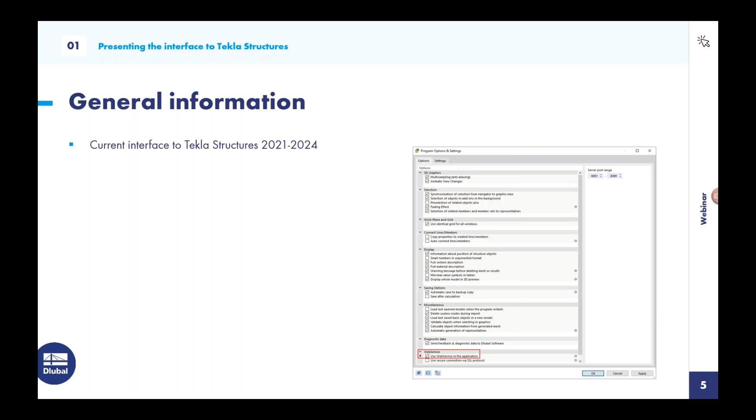Our interface, where's my mouse? Okay, our interface supports the Tekla versions 2021 to 2024. It's a direct interface based on the web services. So we do not create a file of a certain type, but we transfer the model directly from one program to another. So to do this, you need to have Tekla and RFEM. Tekla and RFEM must be open on one PC to transfer the data from Tekla to RFEM or from RFEM to Tekla.

The installation of the interface must be done manually. So after the RFEM installation, you find under this following path a setup file. You need to run the setup file, and a Dlubal tab will appear in your Tekla ribbon. And both the import and the export are started from the Tekla ribbon. And the last step is to check the necessary options for the interface. So you need to check your program options in RFEM 6 and activate the web service option. And after that, that's all for the setup of the interface, and now it's ready to use.

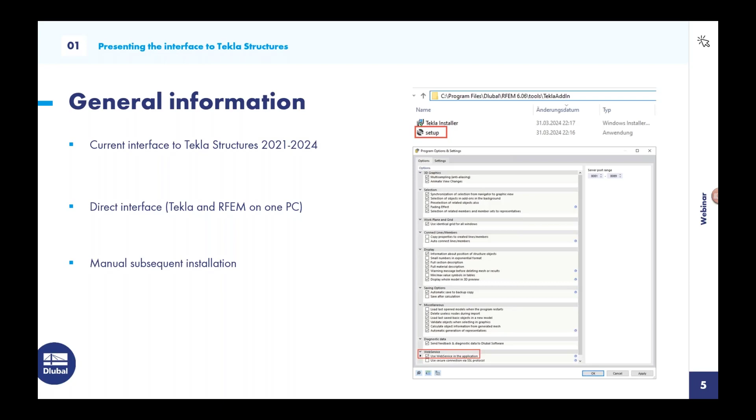So next question is, what information can we transfer from Tekla to RFEM? These are the main objects. We can transfer members and surfaces, also the information about the sections and the materials. And when we use the analysis model in Tekla, you can also already define supports, hinges, or rigid links in Tekla and export this information to RFEM.

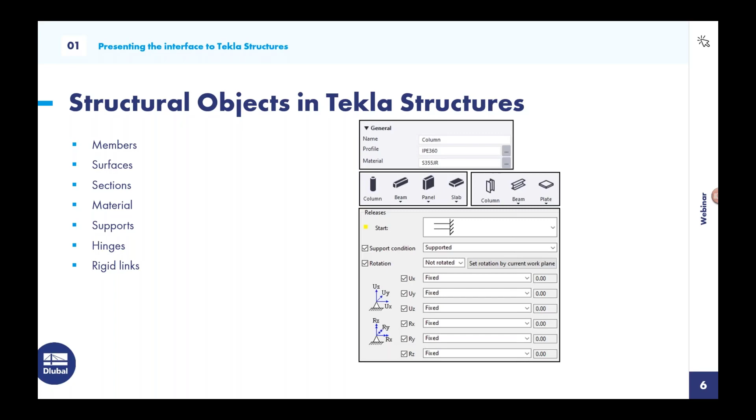So let's look at the export options for the export from Tekla to RFEM. We have the following export options available. We have two types of model we can export. We have the physical model. It's like a CAD solid model which does not take into account the axial positions. So elements are not automatically connected to each other at their intersections, since we are only referring to the axes of the physical elements. And this is something I want maybe to show you.

So if we have a physical model, for example, like this, and the wall meets the ceiling. In this physical model, the bottom edge of the wall meets the ceiling at the bottom edge of the ceiling, the black one here. And this is the physical model, and with a structural model, we require an intersection between these two axes of the models. So if we export only the physical model, we get some connection problems in these areas. And to solve this kind of connection problems, we have the option to generate an analytical model in Tekla and export this analytical model.

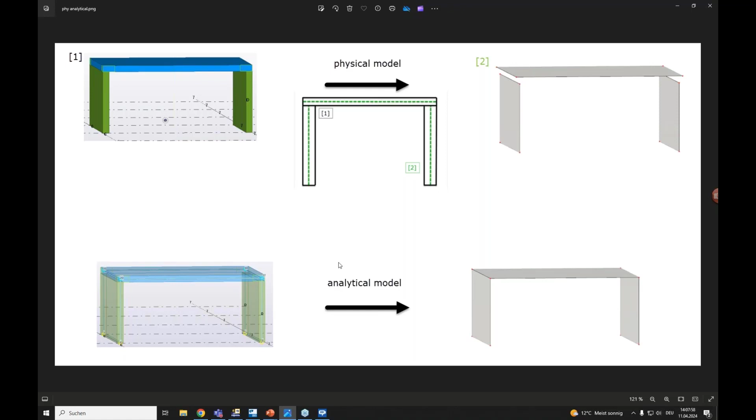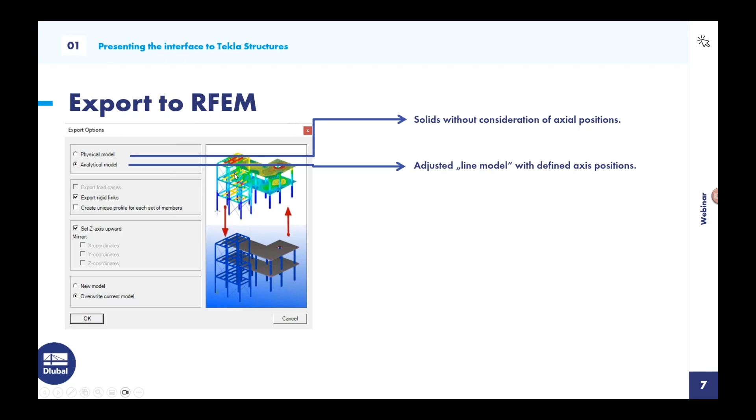So with this analytical model, maybe I show this here. So here we can also export the analytical model, and with this analytical model you get an adjusted, call it line model, with defined axis positions. So every element will be connected, and you can just export this model and keep on working on the structure.

We can also transfer rigid links we generated in the Tekla model to RFEM. So when analytical model elements are not aligned or a rigid connection is created in Tekla, we can just transfer it to RFEM.

And some cross sections that are the same are summarized in one cross section number in RFEM. So with this option, you can separate them and get an individual cross section number for each member from Tekla. The Z-axis in Tekla is aligned upwards. So with this, we just align the global Z-axis in RFEM also upwards.

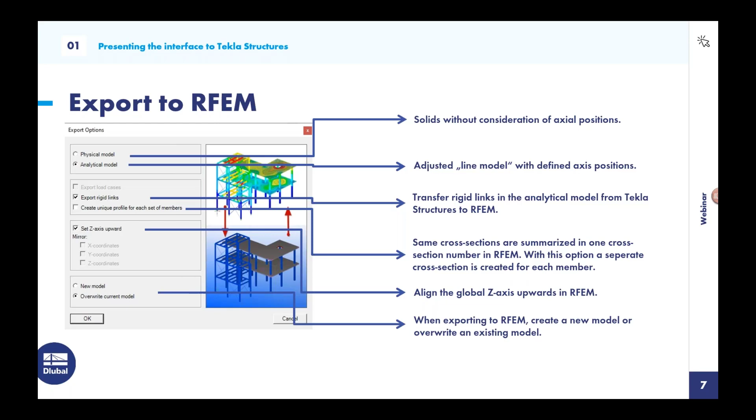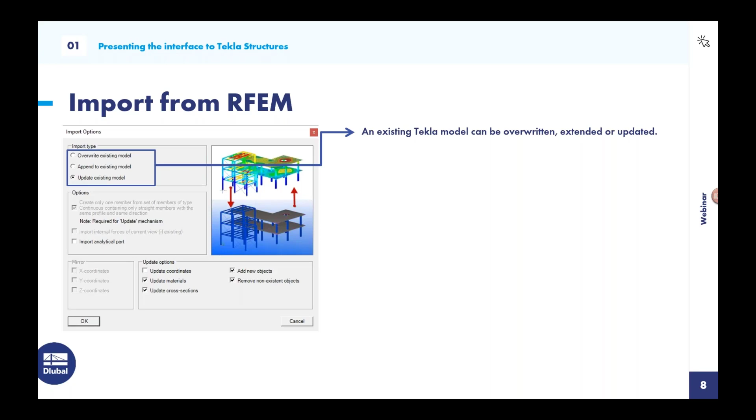And when we export the Tekla model, we can create a new model in RFEM, or if we have a model opened, we can overwrite an existing model. So that's all for the export options. If we import a model from RFEM to Tekla, we have the following options available for now. We have three options for the import type. We can overwrite a model, we can extend a model, or we can update changes we made in the model.

The update has some separate settings we can adjust. So we can update the coordinates, we can also update the materials and cross sections, and also new objects added in RFEM are added, or if we delete objects in RFEM, they can be removed also in Tekla. And what I'm showing here is for now an internal version of the interface. So the update function will be available next week in the customer version. So for now, maybe it's still grayed out for you in the actual version.

And we have also the option to generate an analysis model from the RFEM model if we import it to Tekla. And if we are extending a model or overwriting an existing model, we can also mirror the elements if we want in X, Y, or Z direction. Yeah, that's it for the import options.

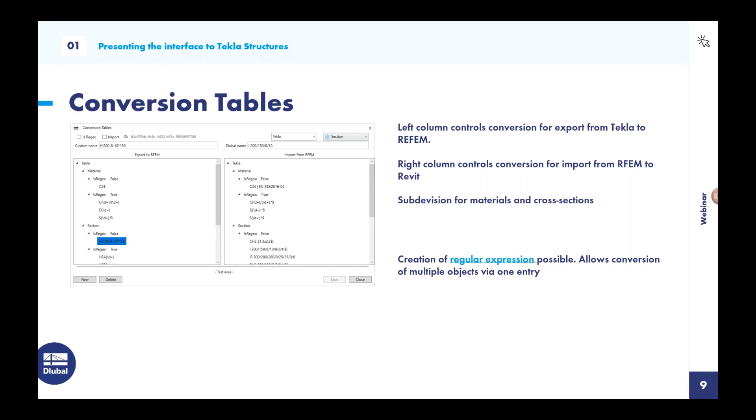So that's all for the functionality of the interface. Now we want to look very quickly at an overview of how we can apply this in a workflow. So a possible workflow may be that we generate an analytical model in Tekla. We define information about the cross sections, materials, supports, hinges, member types, and also rigid links. Then we can export this complete model to RFEM.

We can modify this model. We can add members or define loads and design the structure and optimize it. And every change we made, we can transfer back to Tekla with the update function. So every change to sections, materials, or newly added objects can be updated in the Tekla model.

So if we want to look only, for example, at the steel model in Tekla, we can also generate different analytical models independent from each other. So we can only export one part of the model to RFEM and only look at this one part in RFEM and apply modifications and additions, and also update only this part of the Tekla model.

A last possible workflow would be if we define a structure in RFEM and want to export it to Tekla. We can also export the whole model or a part of the model to Tekla, and if there are any changes made afterwards, you can also export them to Tekla with this update function.

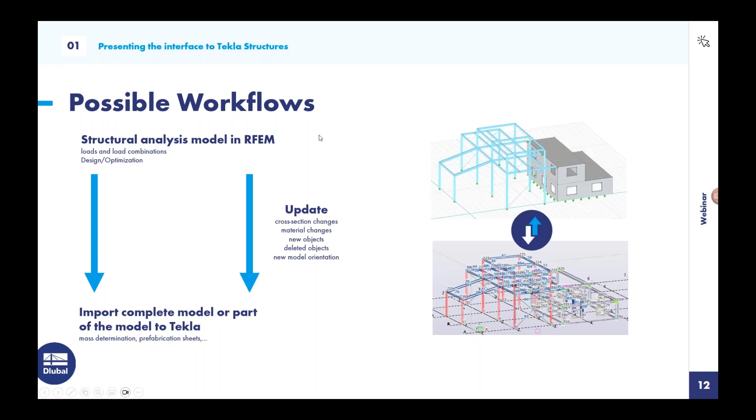And yeah, that's all for the presentation in this PowerPoint. We switch over to Tekla. So here we have a model. If you installed the interface with the setup files shown in the presentation, you find this Dlubal tab on your Tekla ribbon. And here you see the things we talked about, the import options, the export options I showed you, and also the conversion tables.

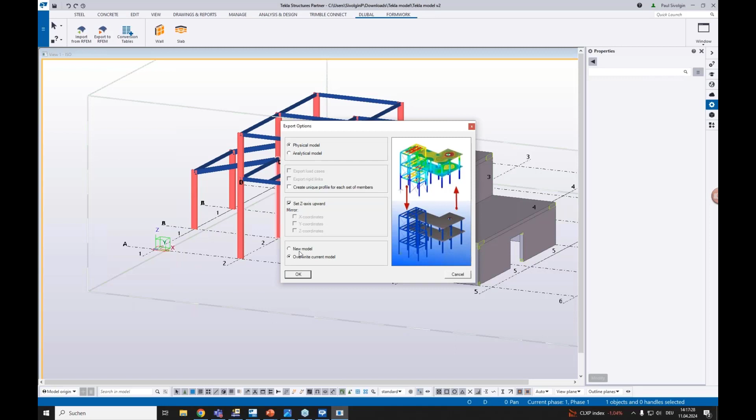So first thing I want to show you is what happens if we export this physical model without generating any analysis model. I have an RFEM file opened, so I can export just this physical model and overwrite the RFEM file. If we start the export, we will see that RFEM gets locked down here. Gonna start now, I guess. Yeah, it's locked, so the data is transferred to RFEM.

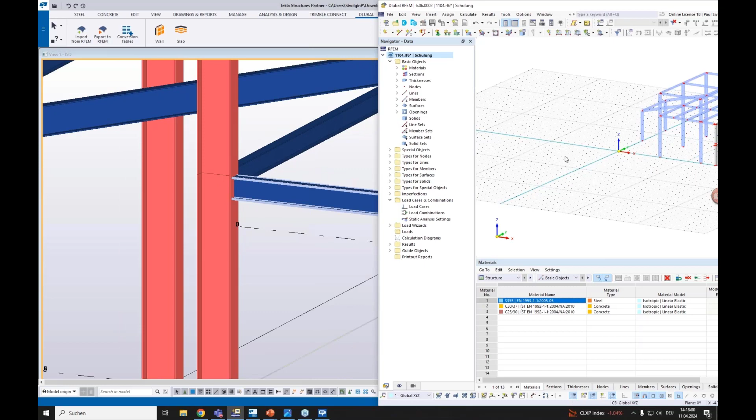And if you look at this beam and this column, we see that the beam is connected to the flange of the column. So when we transfer it like this to RFEM, we also see that this beam is connected to the flange of these columns. But if we look at the line model in RFEM, we see that we are missing this connection from the analysis model here. So therefore, it's a better way to use this analytical model in Tekla. And that's the first thing we want to do. We want to generate this analytical model in Tekla and look how we can work with it.

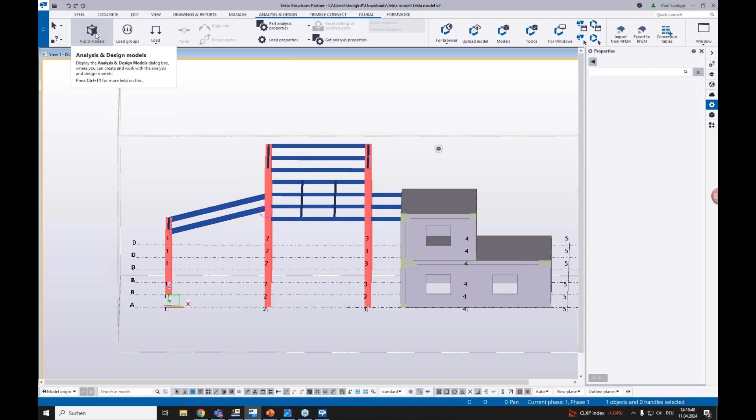So if we want this model, we go to Analysis and Design. Here you see the analysis models and design models. First, we can create a new model. Very simple. And here we can define some basic properties. Here you don't need to choose something. That's some old presets from RFEM 5. So this preset is completely fine.

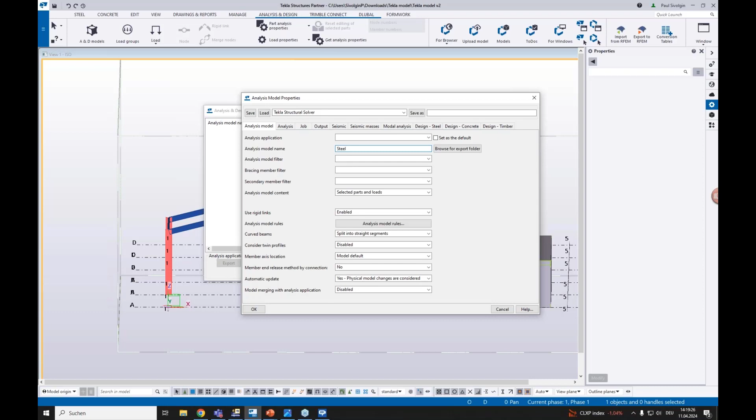The only thing we can maybe do is define the name for our model. I will name it steel because we only look at the steel construction today. Then you can press OK, and this analysis model is generated. It still has 0 parts because we need to select objects and add them to this model. So we could just select our steel model and add it to this analysis model, but here's a tip for generating this analytical model.

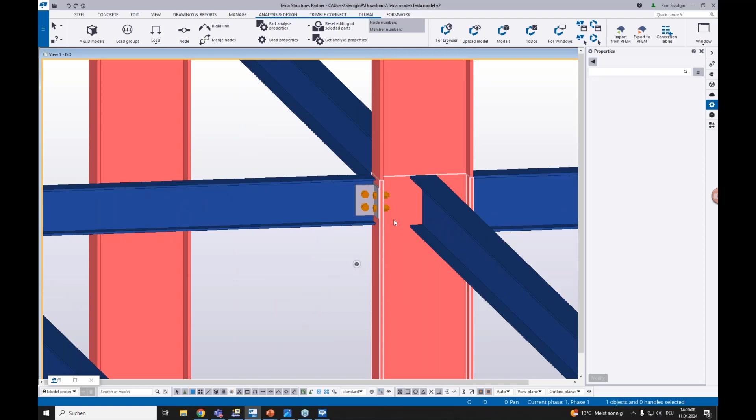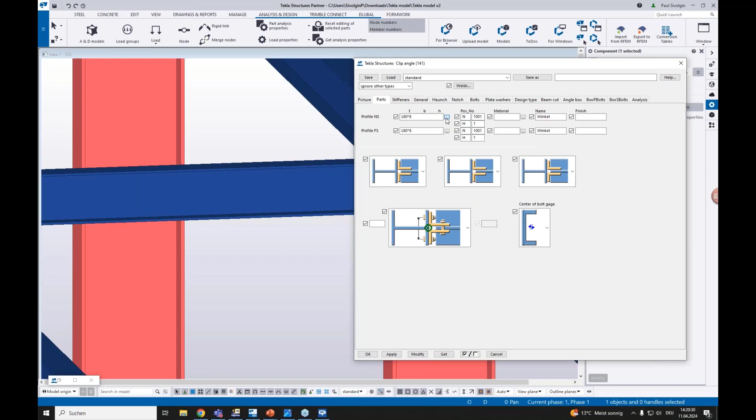A note from my side: if you already defined some components in your model, like here, there may be a problem if you just mark your whole model and generate this analysis model, because sometimes, like in this component, this plate is defined as a profile, only as a normal profile. And when we generate this analytical model, we also generate analytical elements for these profiles, and we want to avoid this because we want this analysis model only for the general steel structure.

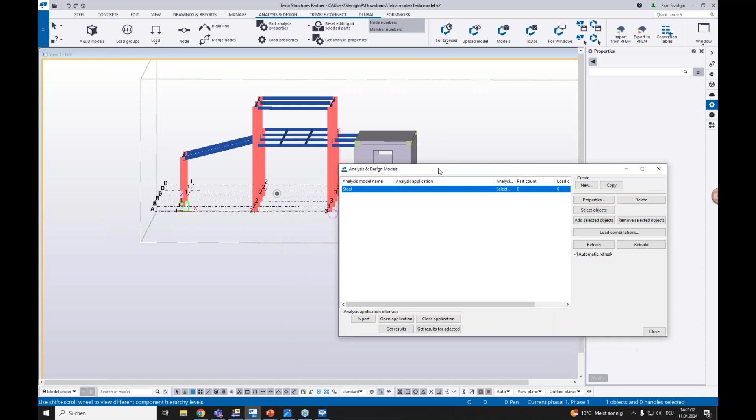That's why you can deactivate the selection of the components. So if you select your model, the component is not selected and no model is generated for this component, which is what we want. So if we deselect these components, we can now say, okay, we want to select all these objects, this construction, and say add selected objects.

And now you see, make it smaller, here we have these blue elements. So the analytical elements are generated in the axis of the beams and the columns. And now we can work with this. Now we will show you how we can work with this model. So at first we can double click on one of these elements and we go to the properties of the beams, or we move to the properties of the columns.

And when we open these properties, we have some settings we can make. At first, we can define here in the analysis the class, the member type. For RFEM, we have the definition for a normal member type beam, or a truss, or a compression member, or a tension member. So for our structure, we want to define some truss members.

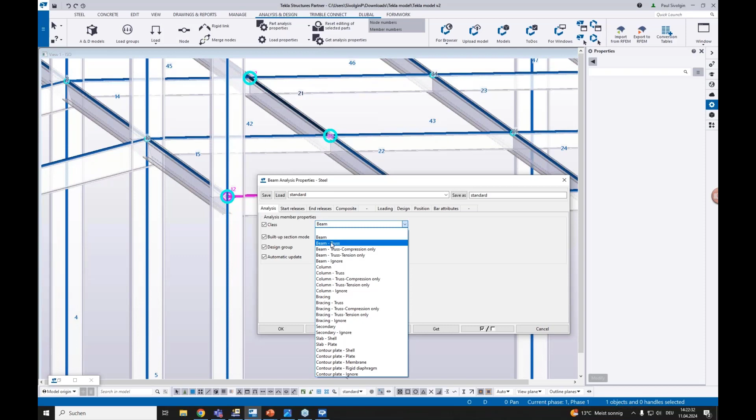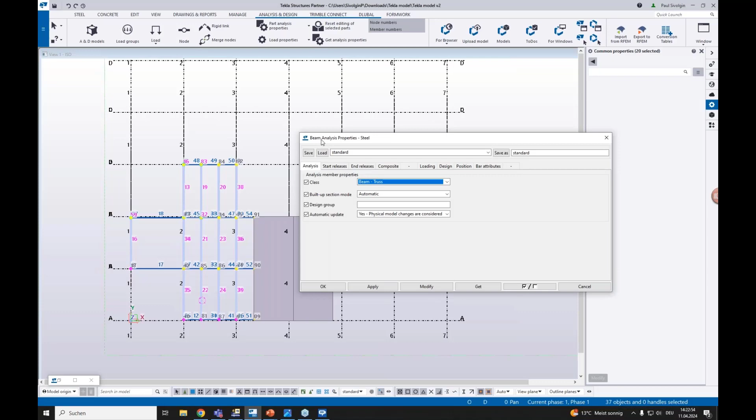For this, we're going to look at our model from the top, and all beams are oriented in this direction. We select them, and now we can say, okay, we want these settings for our analysis beams. We marked our beams and say, okay, we want to modify these beams and set the class to beam truss. So the member type is set to truss later in RFEM. We can modify this member, say apply, okay. And now you see they are green colored, so those are our truss members.

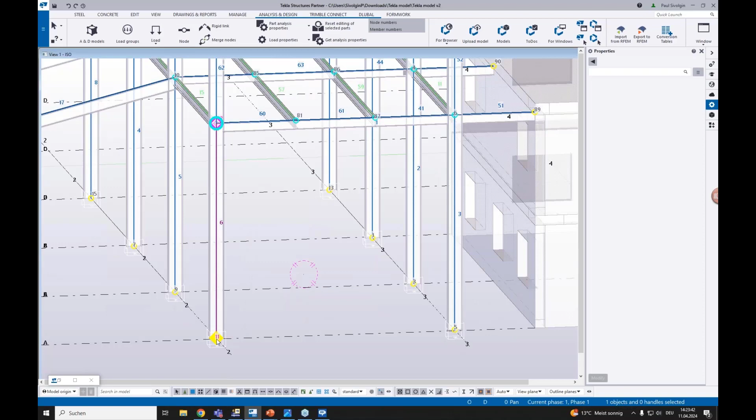What else can we define? We can define supports, the supports for the columns here. The supports can be defined in the properties of the column or in the properties of the node. I can show you here. If you double click the node, you have the node properties, and here you also can define the support. But the basic setting is that you define your supports in the properties of the column.

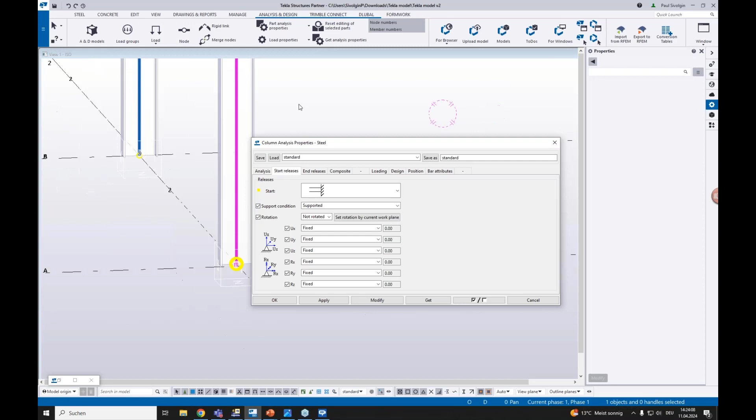So we have a start release and an end release. It's declared so that this yellow square shows you where the start release is, and this purple square shows you where the end release is, so you always know which node you're working on. So here we have some support conditions. We can define a support, or we also can define a hinge if we want. So it's maybe some work to always define the hinge you often use in RFEM.

That's why it's useful to get some presets like I did. So I defined the typical RFEM supports inside Tekla, so I can just load these properties into my model. So I want a hinge support. You can say, okay, I want to load these properties, and this will load inside here. That's the definition for the hinge support.

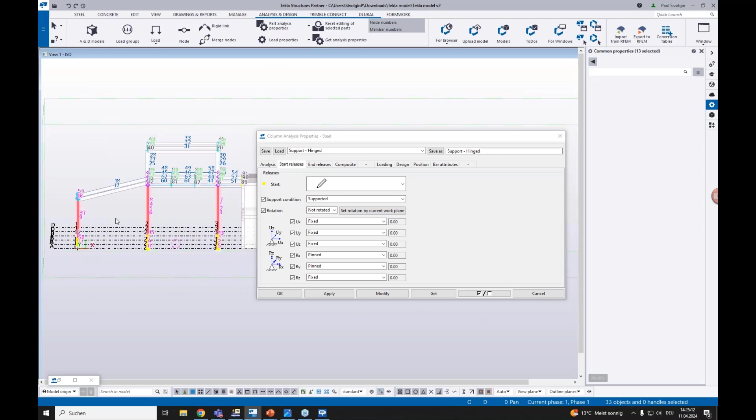And now I just can say, okay, I mark all my columns. Okay, I have every column, and say I want to modify these columns and add a hinge support at the start, at the yellow square. So modify and apply. Okay, now we have a support for all our columns. It works the same way for our beams.

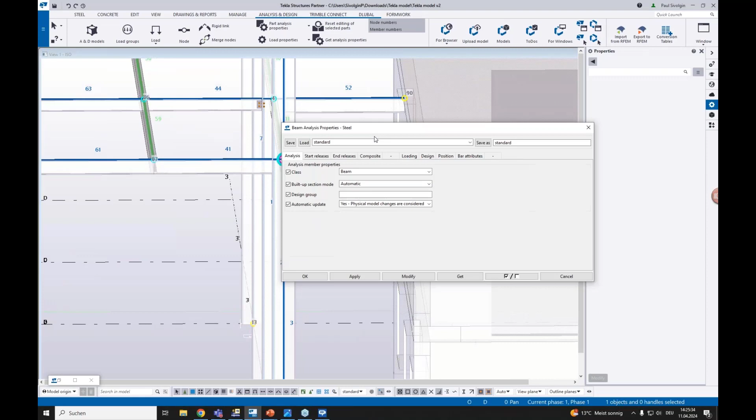So it's the same principle. And here you have the member type, and you also can, as said, define hinges. So for this, I also have presets for my hinges defined. Those are the typical presets, typical hinges from RFEM I use, so you don't always have to define them and lose some time.

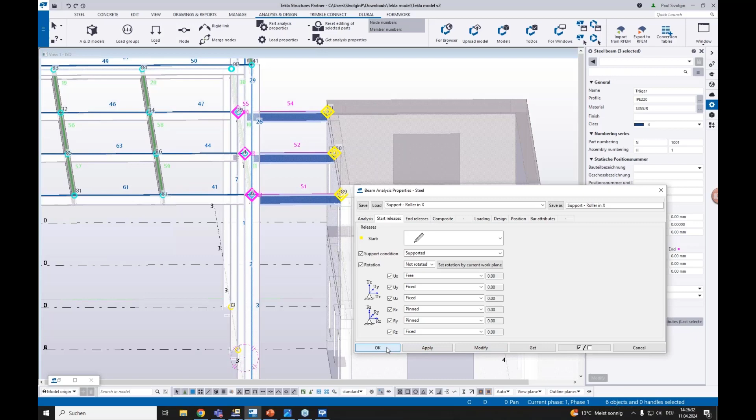So here we also want some supports on this end of the beam. So I say I want a roller in X. So I can load these properties in my beam properties, mark these beams I want to adjust, and say, okay, I want these properties modified onto selected beams. Now this is modified, say apply, okay. And that's all. The model is now kind of ready.

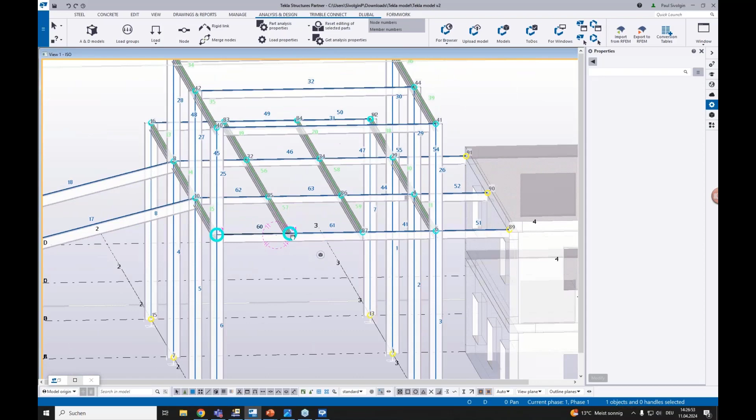And something we need to check is that we have generated this model automatically. So maybe we need to check if every connection is okay, if it looks like we want it to. And to make it easier, you can again open this model settings. You see some display warnings down here. So if there are some errors in this model, you can just display them. And here you see there were warnings, errors in the model creation.

Warning: member is shorter than the minimum length. We can look at the details of this warning, and here we make this smaller. Here you see the warning: member is shorter than the minimum length. And now you can select which member is affected by this warning. Here it's a very simple model, so you directly see which member the error comes from.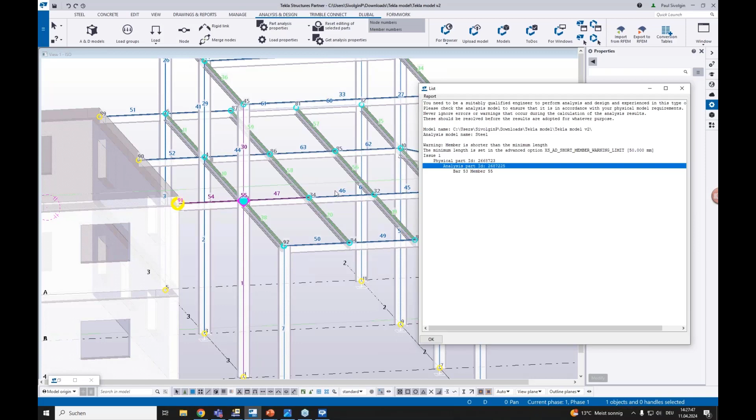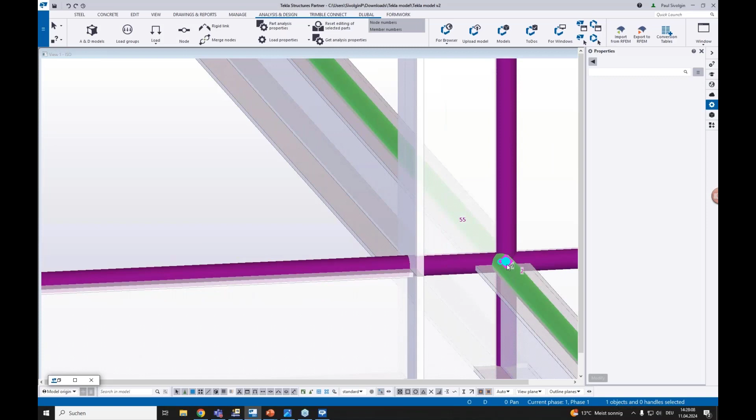If you select this part and can't see the mark in your model, you can also zoom to the analytical part, zoom in, and now you see it's this beam. And when we zoom in, we see there is an intersection and we have two nodes generated. So this node, maybe I change the view. Yeah, this node connects these 4 members, and this node connects these 3 members.

So there's some error, and if we look at these members here from the other node, we see that the analytical element of this beam is not exactly in the axis of the element of the column.

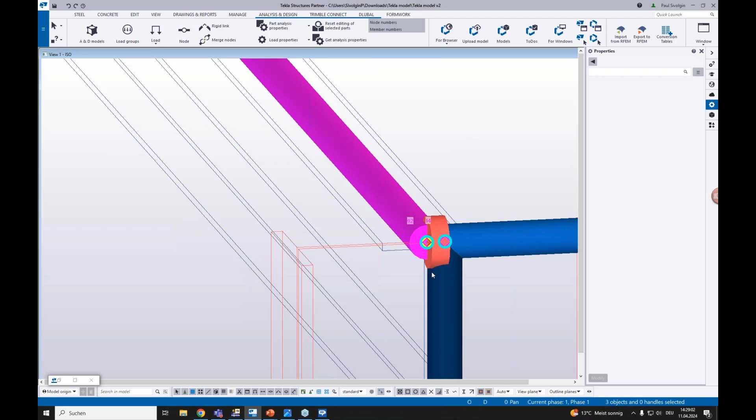So if the axes don't meet at one point, Tekla generates a rigid link. So if the axis of this member, this member and this member don't meet at one point, this rigid link, this red circle, is generated. And sometimes it's useful, but in our example, it's just a mistake in the model. So we can move this analytical model into the axis of the columns again.

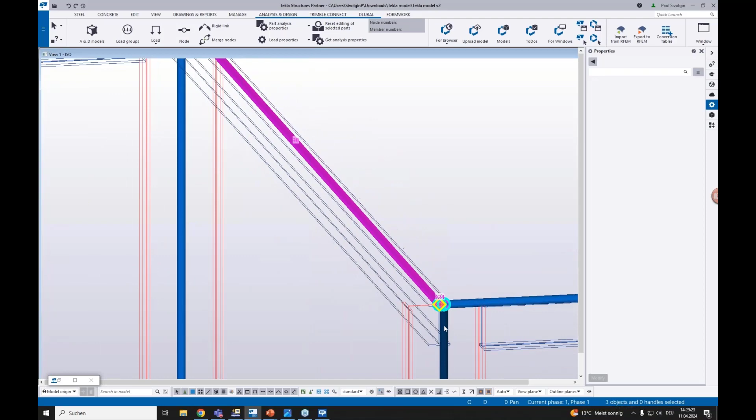And how we do this, the better way is to go back to a point where a lot of members are connected. So in this case, we want to move this connection to this node, and therefore we can just mark these two nodes and say we want to merge selected nodes. We can pick the merge target node. We can pick this node, and afterwards, okay, we are not allowed by current settings to move the axis. We say we will allow it for this case, and you see this axis moved.

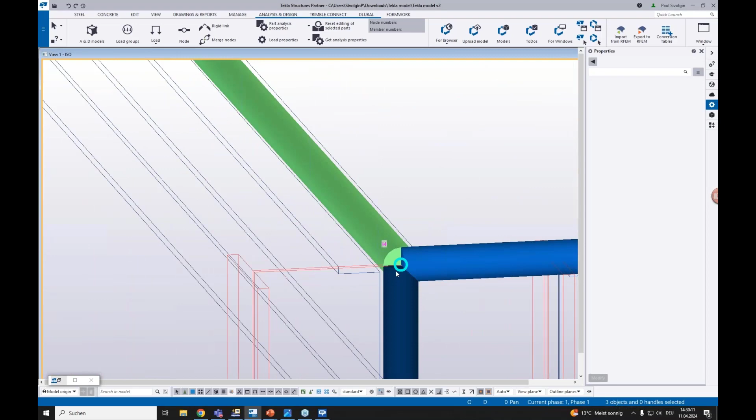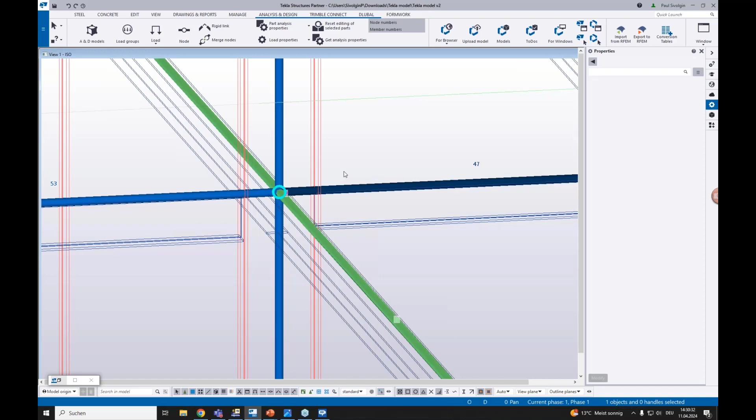So if we look back at this side, there are no rigid links anymore, and so the axis of this member is in the same axis as the analytical part from the column. So that's one way to remove some of these intersections. And it's important to notice that only the analytical model is moved. The physical model we draw here or we get from the constructor is not moved if we work on these analytical parts.

So when we open our model again here, we see there are no warnings. And that means everything is okay, and we can keep on working. And just another hint from my side: if you define these analytical columns, beams, and so on, you also have the possibility to move them or change the location where the axis is defined.

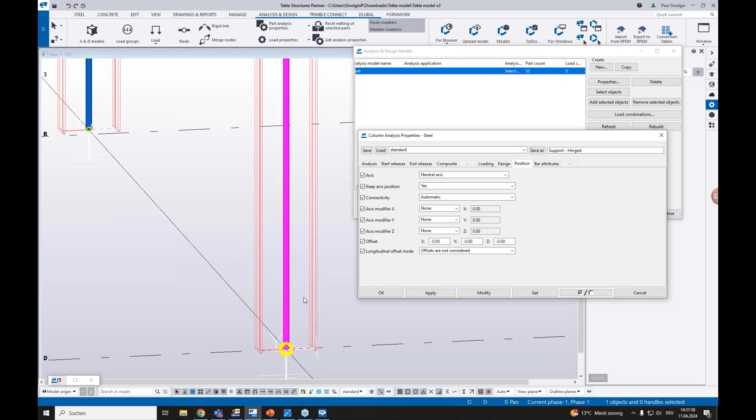Here it is always the neutral axis of the physical member, so you can say I want it defined at the top center. You can say modify, and this will move to the top center for your beams, or if you want it at the bottom center, you can move it there. The basic standard is always the neutral axis. And if you want to move it freely, you can also use the offset, so you can move it directly in the X, Y, or Z direction if you need it. But we will keep it like it is here.

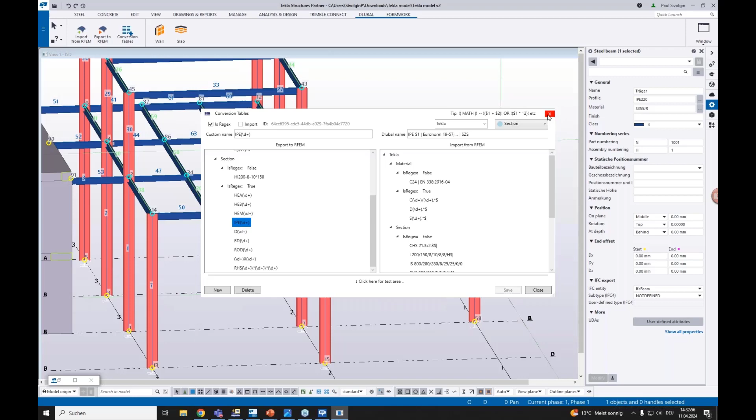So that's it for the analytical model. We can transfer it now to RFEM. And some last information: we use IPE profiles and a material. This is also already defined in our conversion tables. So these definitions are already inside if you install this interface, so there's nothing you have to do. And yeah, that's all for the analytical model.

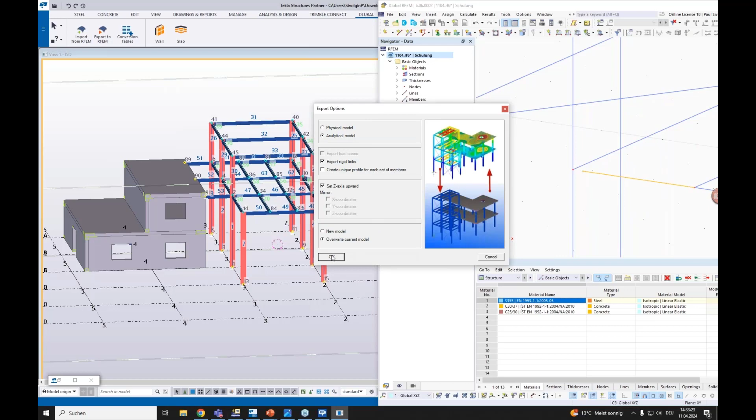Now we can export it to RFEM. So we choose this analytical model, and we don't have any rigid links, so it doesn't affect us. And now we overwrite our physical model, I would say, in RFEM. So the currently open model will be overwritten. You will see RFEM is again locked, and the model is transferred directly from Tekla. And now we can look at this model in RFEM.

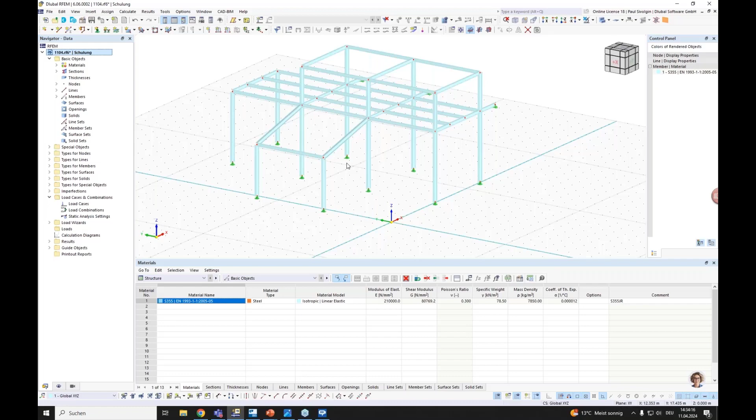So what we can see: the supports are exported from here, from the columns and also from the beams. We see that our sections are exported, the member type is also exported, and the material is also exported. So everything is ready. We can just go on working with this model. And what's the first thing you want to do? I will display it like this.

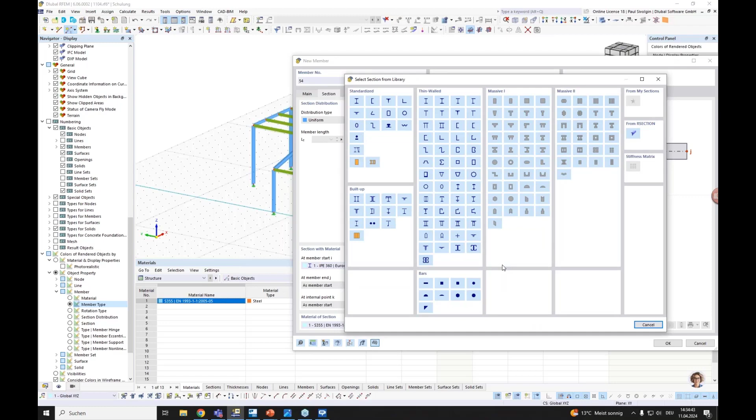The first thing we want to do is to define a bracing for the structure. So for this, I define a new member. I'll define a tension member and define a new section for this member. We define a bar section. We choose this one, an R20, and we can now use this section for bracing.

And I want to define it here. Some bracing. Define here some bracing. And also this area. And finally, also at the back side of our structure. So now I would say the structure is completed. And what's the next step? If a structure is completed, now we can add some loads to the structure.

For the loads, at first we want to go to the base data and activate the combination wizard. Okay, because we want to use combination wizards. And before we define the loads, we need to define our load cases and our combinations. So let's start with this. First of all, I want to change it to Germany.

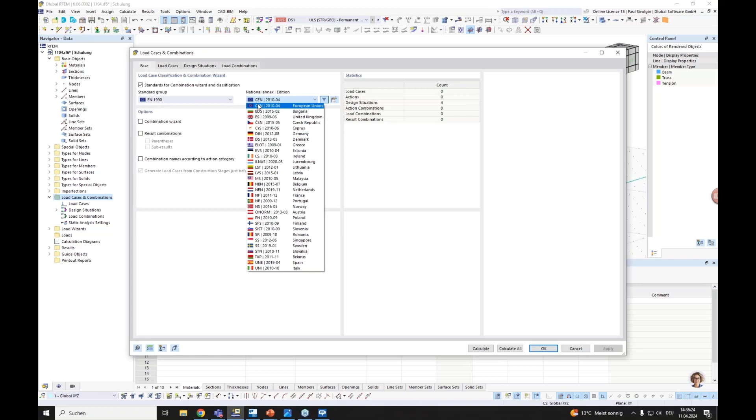And activate the combination wizard. Let's go on with the load cases. So the first load case would be the self-weight. It's already inside here, so we don't have to define any loads for this. I give it a name: self-weight.

Then we want to create—okay, I forgot something. We need to define the static analysis settings first. That's just simple settings, so we just confirm them and define 2 other load cases.

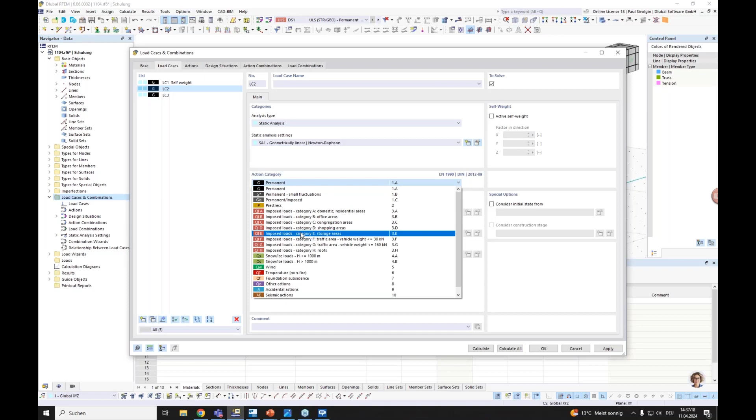Now we want the load case for the imposed load, trigger our imposed load, and as an example, we want some snow loads on our structure. So with this, we define the load cases. The action categories are assigned already.

And we want to look at only the ULS design situation, so we just want to delete this one from our design situations and only look at this one. For our load combination, we can use this wizard.

We can define here again the static analysis settings. I define some new ones and look at the second, defining the analysis type as second order for our combinations.

Now we have here our combinations. Let me check something. Okay, yeah, we can say that's ready. So now we have defined our self-weight load case, imposed load case, and our snow load case.

So let's start with the imposed load. For the imposed load, I would like to use some load wizards. We can generate member loads from an area load we define, so let's start with this.

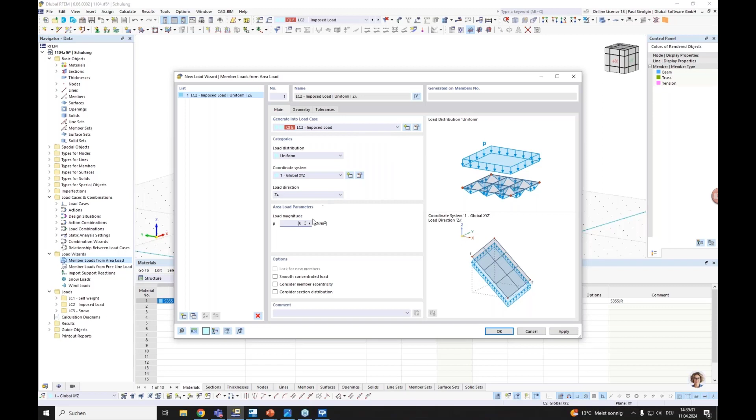So we generate this into load case number 2. It's already assigned, and we want a load magnitude of 5 kilonewton. We need to define it negative in the Z direction, because our Z direction is looking upwards, like in Tekla, so it's a negative value.

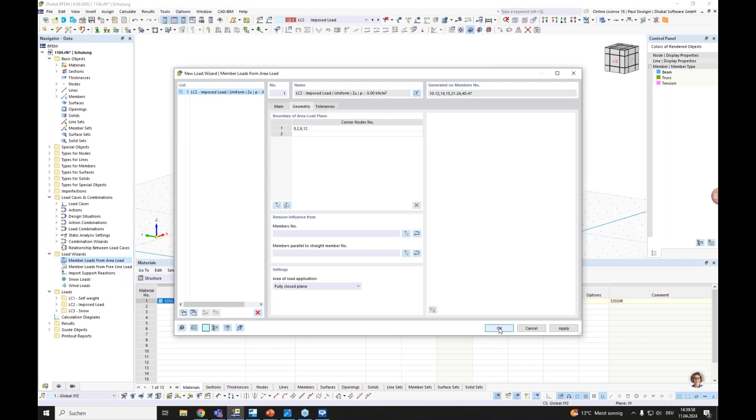And afterwards we want to select our boundary lines for the plane, so we can select the corner nodes in the graphic. I want my imposed load to be placed inside here. Okay, I will say okay. And now you see here our imposed load.

I can make it a little bit smaller so it looks not so big. And if you want to look how it's separated on the member, you can display it separately. You can make it again a little smaller, and here you see how the area load is working on the members. Okay, so this looks cleaner.

After this we want to define—so okay, we have our self-weight, we have our imposed load—we want now to define the snow load. For the snow load you can also use a load wizard. Open the load wizard, we can define our roof type and our roof corners.

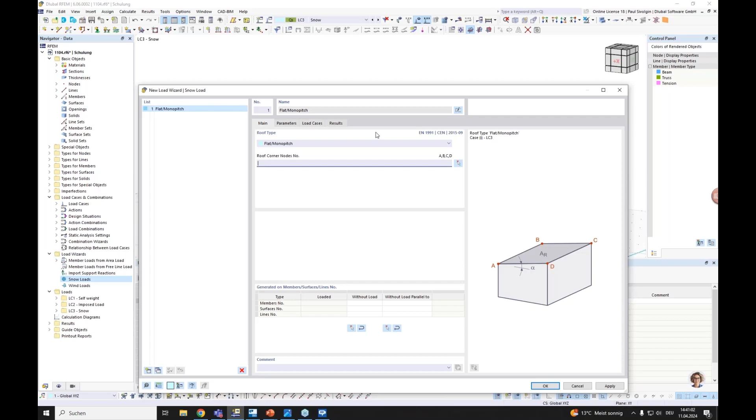And we have, at first, let me check. Yeah, we have this roof at the top side of the building. I would call it... Roof 1. And for the snow load, we can define the parameters.

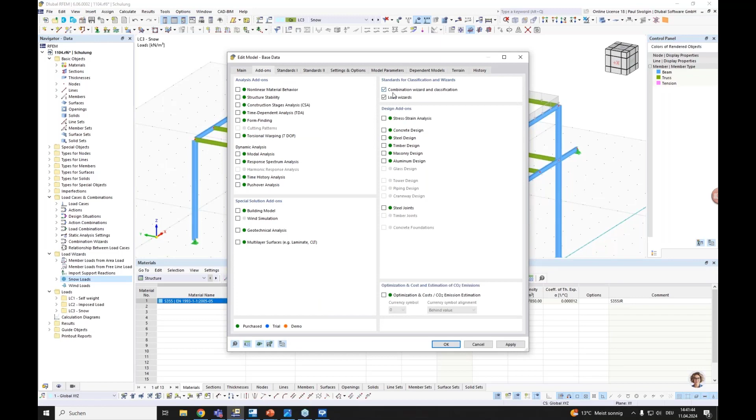Wait a minute, I need to check something. I think I forgot to activate the load wizard combination. Now it's activated. So where does it take the parameter from? Okay, I forgot to define the German settings, the German standard for the load wizards, so I could not do it like I wanted.

Okay, my bad. Now we can look like this. Yeah, for the snow load we can define a manual value if we have one, and if we don't know it, we can just use the snow load map from our GeoZone tool.

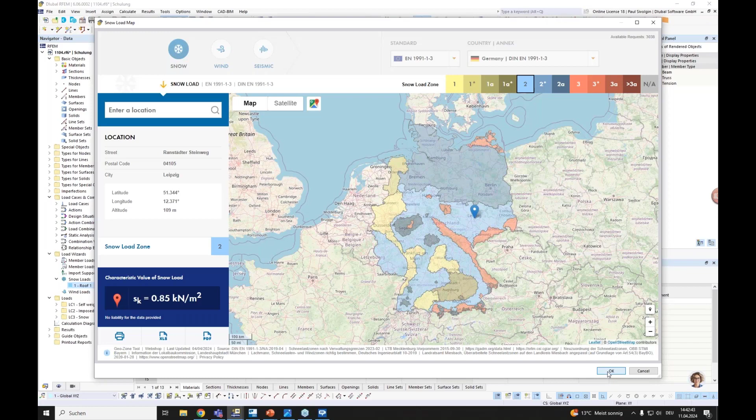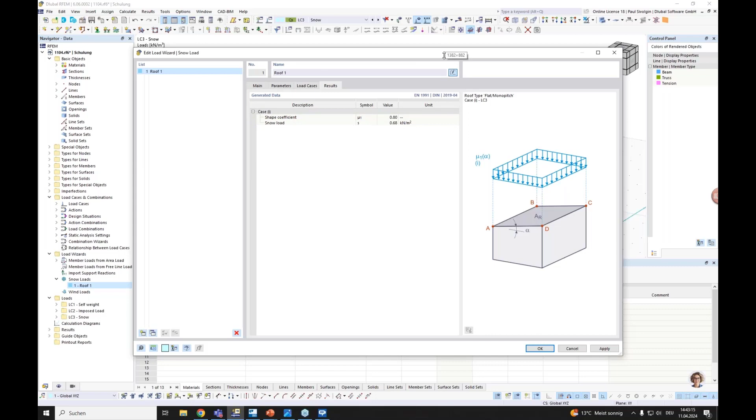So you can select your location. I select my location, and you get the zone data loaded inside RFEM, and now you will see that we get a value for our snow load from the location we selected. The load case is designed automatically with a snow load case, and here's the result. Here you can see the results for the snow load and the shape coefficient, and you can apply this. Now this value is applied to our snow load.

Now we want the snow load also on this part of the roof and also on this part of the roof, so we can just copy this in this list and say this is our roof number 2 and this is our roof number 3. And now we need to change the corner of the roof, so we select this part of the roof for roof number 2, and roof number 3 is this part of the structure.

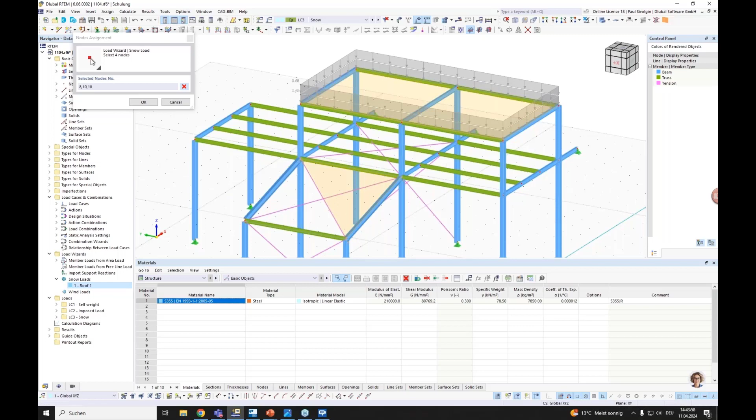So I apply. Now we can check before closing the settings: is everything okay? We have now here the snow load here and here. It's fine, we can say okay. That's how we want it.

And the next step would be the design. So what we have done: we have a structure, added some material as the bracing, we have added the load combinations, the load cases and the loads. And now we can begin to start with the design.

First of all, we need to activate our steel design add-on.

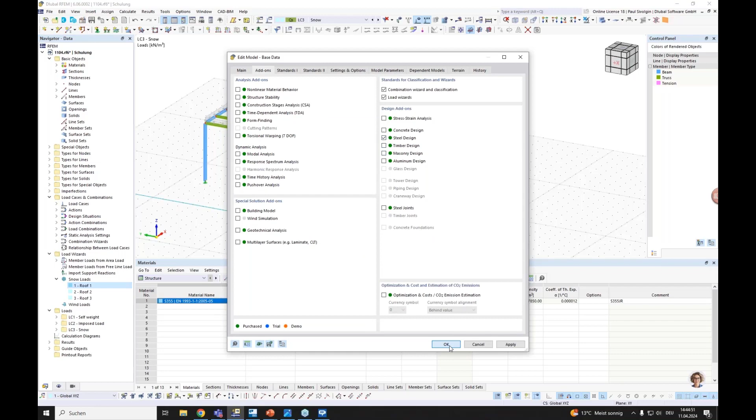Now we only want to look at the cross section design. So for this, we go into the steel folder, to the ultimate configuration, and say we don't want to perform stability design. Say okay, and afterwards you can find in this table the steel design tab. You can open this.

You can see every input data you need for the steel design. So we have our design situation, we have our objects we want to design. We want to design all objects. We have our used material, and we also see our sections. So I'm gonna start it now.

It shows the results. First it calculates the load cases. They are not calculated yet, and then the load combinations. You will see here it's our load combinations, and afterwards the steel designs are also calculated.

That's all. So here you see the results. We see that the design check ratio is very high, so we need to change something about the profile sizes maybe.

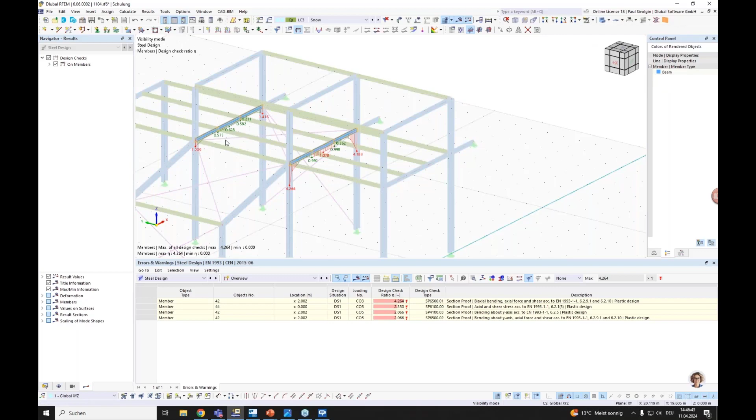So we can maybe hide the loads and look at the members where the ratio is higher than 1. These members, showing only selected objects, so now we see these members have a design check ratio that is too big.

So we can adjust the cross section we use here until the design check ratio is smaller than 1. But we don't have to do this manually because we can adjust this process automatically.

If we go back to the input data from our steel design inside this table, we have our cross sections we use. This one is the IPE 180, and now we can say use another section for this design. Here we have the option to choose optimize. With this optimize setting, we say find us the smallest possible cross section for the IPE profile series that fulfills this design check.

So we can just say optimize this profile and start the calculation again. Here you will see that the optimization process will start.

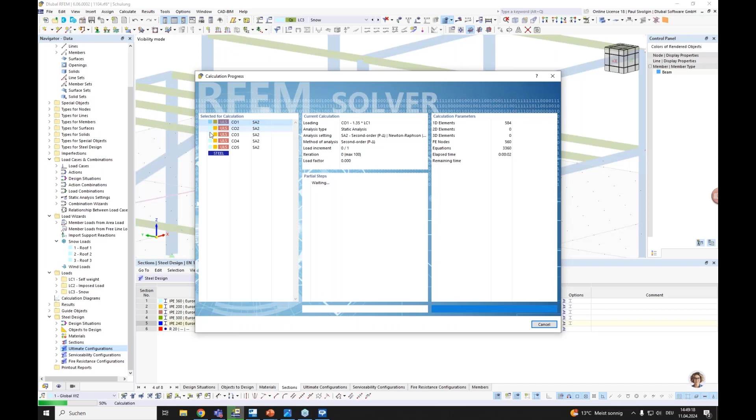So it changed. Now we have to start the calculation again because we also now have a different self-weight of the model. It's gonna be ready in some seconds.

Now you see everything is okay with this profile, so we can use it for our structure.

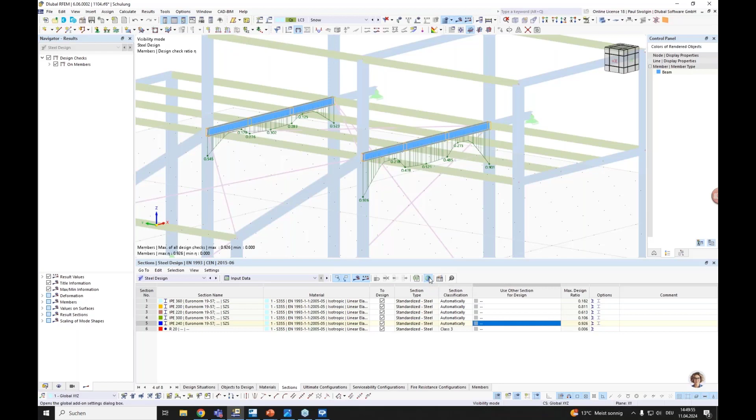And if you think this ratio is way too big for you, you have the possibility to adjust it. If you again go to the input data where we chose this optimization, we have the global settings for the add-on, and here you can select the maximum allowable design ratio during this optimization process. It's set to 1.0, so you can set it to 90% or 80%, however you want to design your structure. Just as a hint.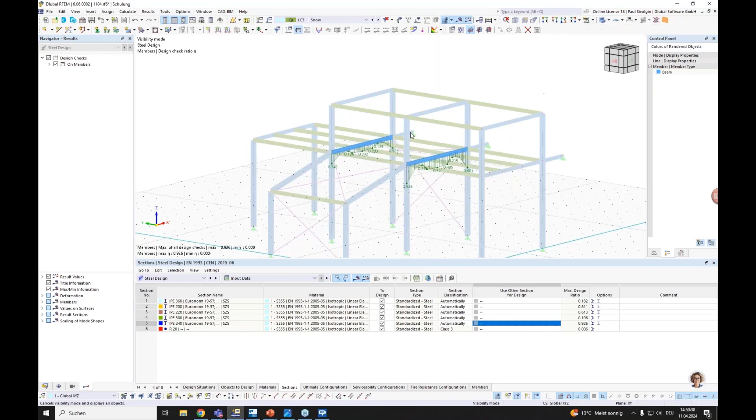So let's summarize what we have done. We exported the model from Tekla to RFEM, and we were able to continue working on it directly in RFEM, and we added this bracing to the model. We defined some load cases and load combinations. We designed the cross sections, the steel sections, and made some adjustments to our structure.

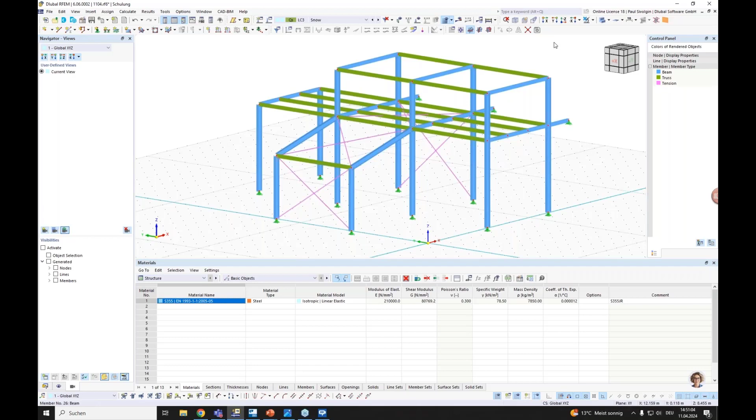Now we want to transfer all the changes we made to Tekla. So I go back to Tekla, close the analytical model, look from this side, and here we see again the Dlubal tab. We can import the model from RFEM. If I click import from RFEM, the connection starts and RFEM will get locked.

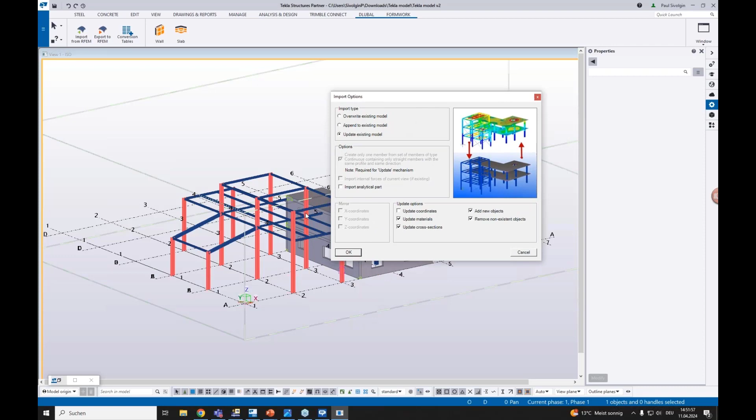Okay, here it is. And now we have the opportunity to update this existing model. So we update the materials, cross sections, add new objects or remove objects. We can say okay, I want to update my existing model, and after some seconds we will see the data transferred.

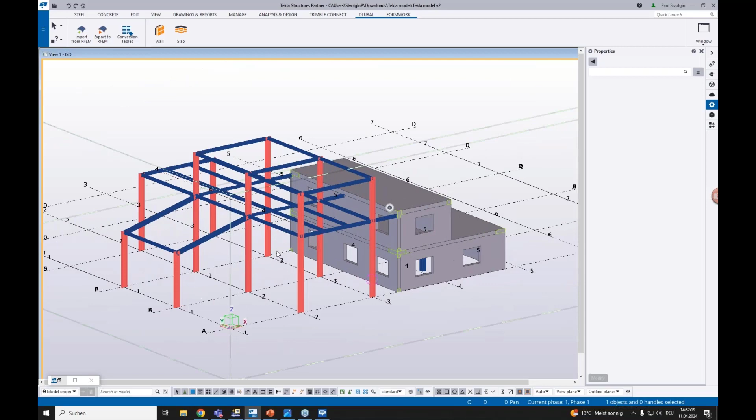It's locked. It always takes longer for the presentation for some reason.

So you can see the bracing is now added in the structure. We have also a profile and material defined in RFEM. We also see that these sections here are updated to the IPE 240.

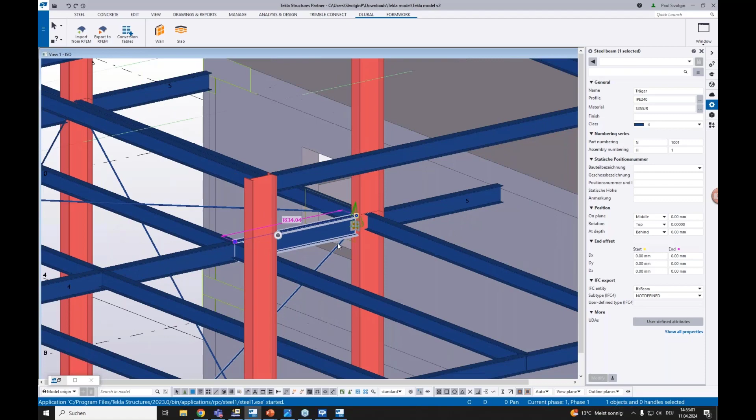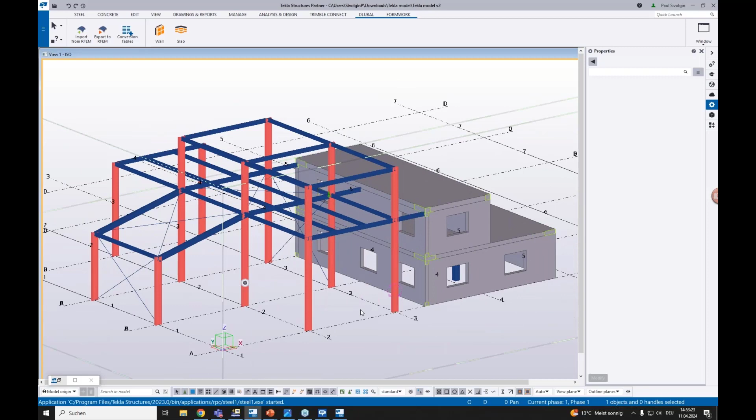We also see that already defined components remain in the Tekla model, even if we updated this cross section in RFEM. So that's the workflow starting from the Tekla model, designing the structure in RFEM, and transferring the changes back to Tekla. What's missing for us now is only that we don't have the documentation for our steel design.

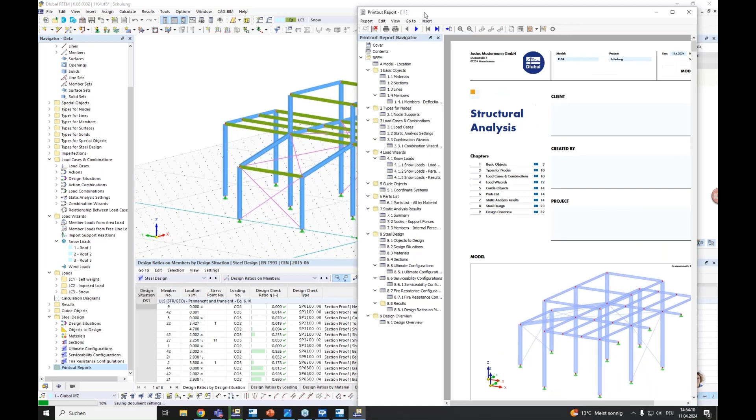It's very simple for somebody who doesn't use RFEM. Let me just show it quickly, we have a printout report we can generate. We can save and show it. The big value of RFEM 6 is that we can use this print report parallel to RFEM, so it opens a new tab. Here you see the printout report in RFEM.

So you can still work in RFEM and always look at your print report and update it like you want to have it. All information about the materials, about the sections, about the results are summarized in tables inside this report. And we can also illustrate information more clearly if we add some pictures to this report.

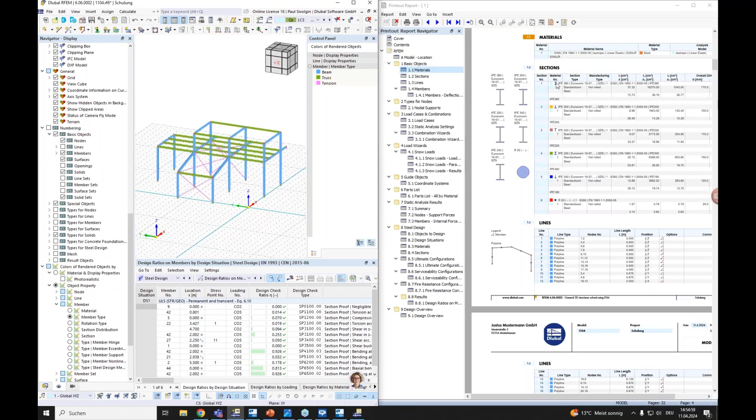So we can always add the current view of our model. If I say, okay, I have these sections in the table and I want to have it in a picture, I select the section in my model to be shown.

And then I can say, okay, print this graph into my report. After a short time, you will see some additional general settings for this picture. I will just save it, and now you see that this is directly added into our report.

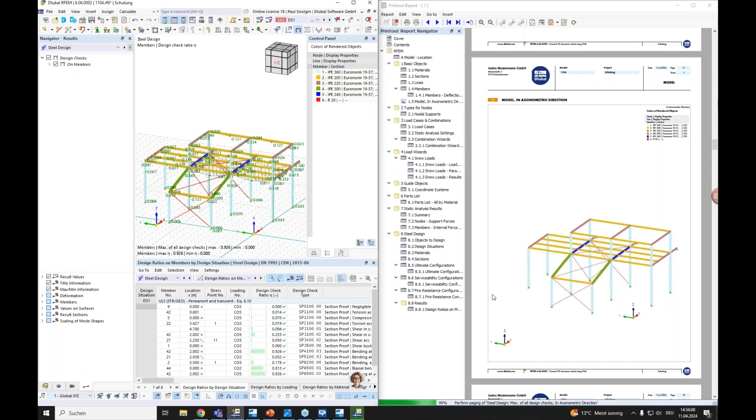We can also define the steel design. Let me check, let me activate the results, the steel design checks, and also just print it in our printout report if we want to visualize them in a picture. Save and show. And this is also directly put into our results folder down here.

And when we say, okay, I don't like this view, I want to modify it, you can just edit the view and say, okay, I want to have it in a wireframe model. This picture will automatically be updated. And if you say, okay, that's fine, but I need more details about the design check, maybe about this critical design check...

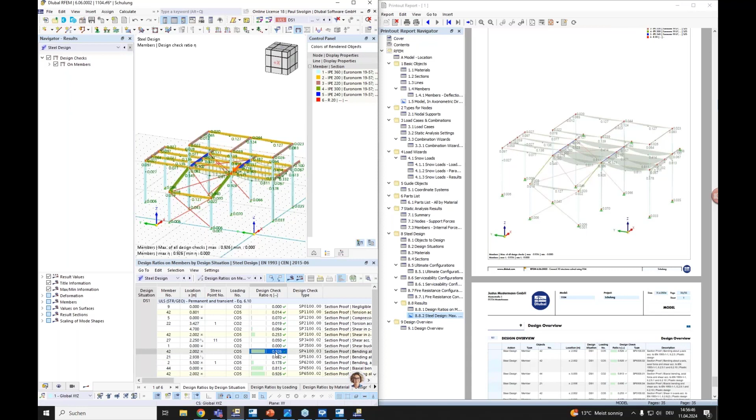You can double click this design check and get shown all the formulas for the design check and also the notes from the used standard. This also can be just printed in our report. In this way, you can store every piece of information in your report that you want to give to somebody else.

Okay, so that's just a brief insight into the result documentation. That's all from my side for this webinar. I want to thank you for your attention, and I will hand back to Andreas.